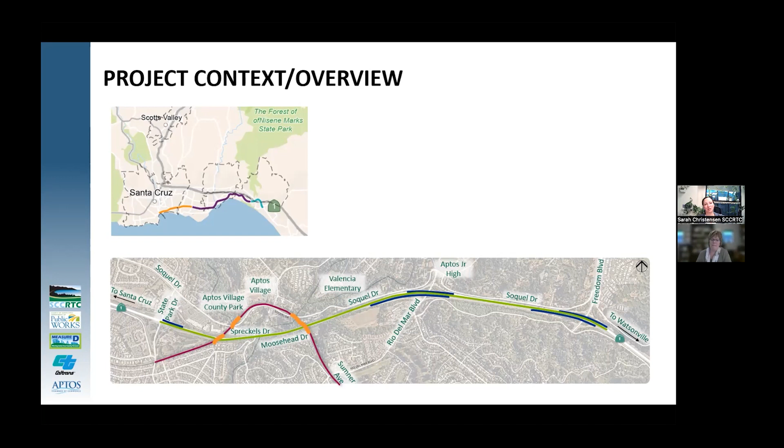Currently, the project is expected to complete the final design phase in late 2024, with construction activities beginning in 2026. The project team needs to hear your input on some of the key design elements to make sure the project fits within the context of our community.

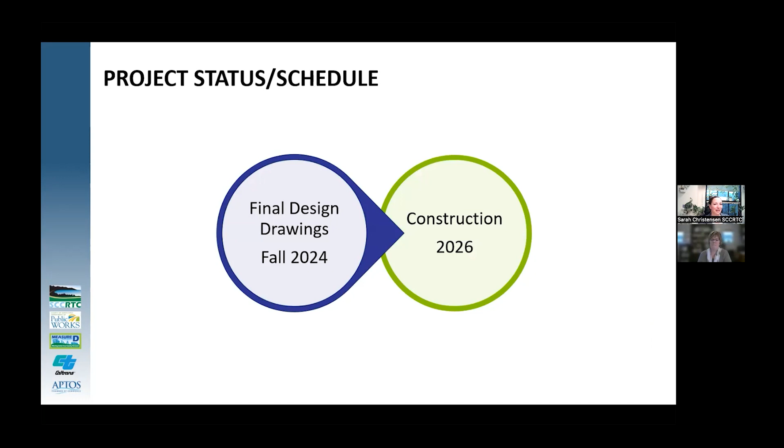Before we ask for your feedback, let's begin by showing some of the inspiration and corridor-wide design elements that have already been selected.

As Sarah mentioned, previous segments have set a tone for many of the design elements. As part of the previous highway design from the Bay Avenue to State Park Drive project, a gateway into Aptos was identified at the Mar Vista pedestrian overcrossing.

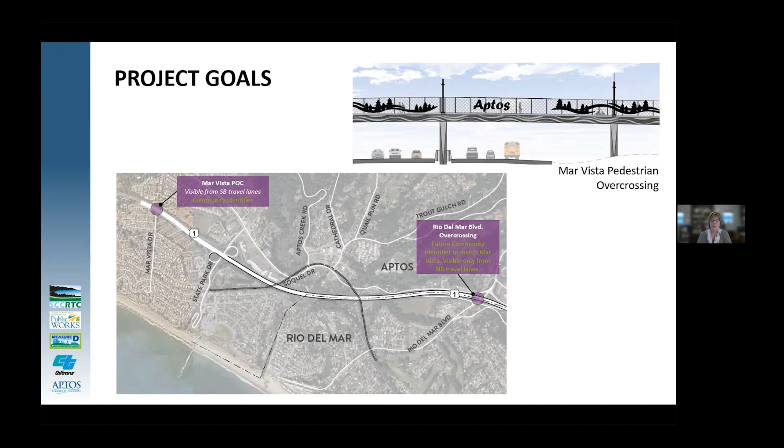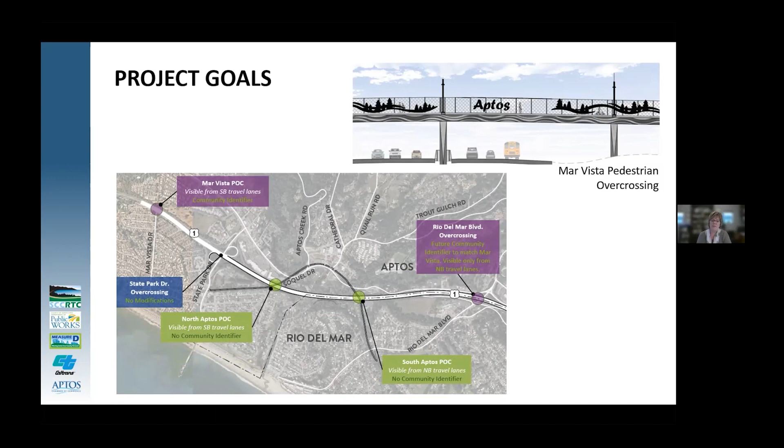And for this segment, we've added the possibility of placing a similar future community identifier at the Rio Del Mar Boulevard overcrossing as a gateway from the south. This allows for the 2 rail trail bicycle pedestrian overcrossings between them to have their own unique character that blends with the architectural theme of the town of Aptos.

All of the elements shown here are consistent with previous highway segments and intended to be easily constructed and maintained within the highway corridor. The proposed plant palette consists of native drought-tolerant trees, vines, and shrubs.

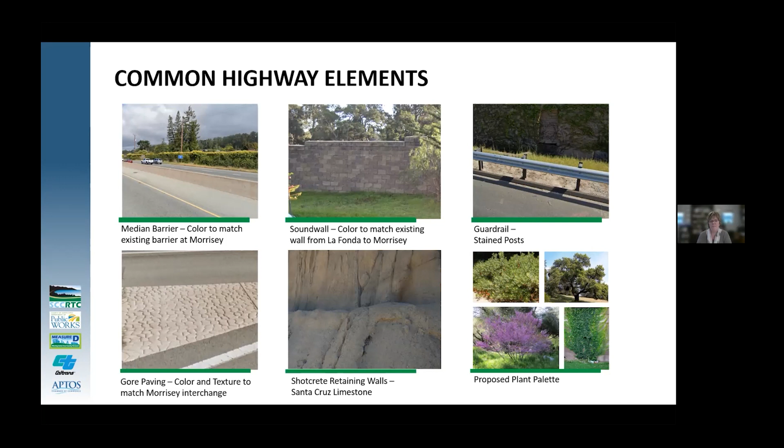The aesthetics for the rail trail were inspired by design elements within Aptos and adapted to a theme we're calling Bridging the Kelp Forest to the Terrestrial Forest. This takes inspiration from the existing rail bridges, historic character of Aptos, and the surrounding landscapes of the ocean, and blends it, bridging it, with ocean influences of waves and kelp, so prevalent in the seascape and Rio Del Mar communities, and previous highway segments and the forest of Nisene Marks State Park.

These renderings show the designs of the South Aptos Bridge bicycle pedestrian overcrossing and rail underpass, which will be duplicated for the North Aptos rail and trail bridges. A new overcrossing will be constructed next to the rail bridges to make a continuous rail trail through Aptos.

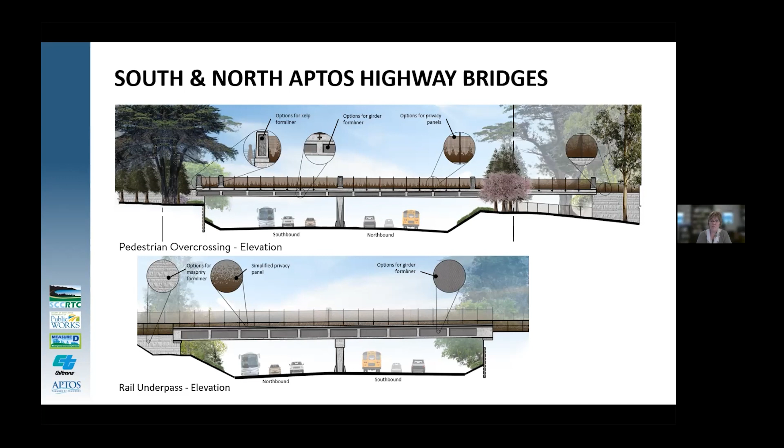The design combines the rustic industrial look of the rail line through the metal fence posts and brackets with nature-inspired formliner and misty redwoods-inspired privacy panels. The privacy panel, masonry formliner, kelp formliner, and girder formliner are all options for consideration in the survey.

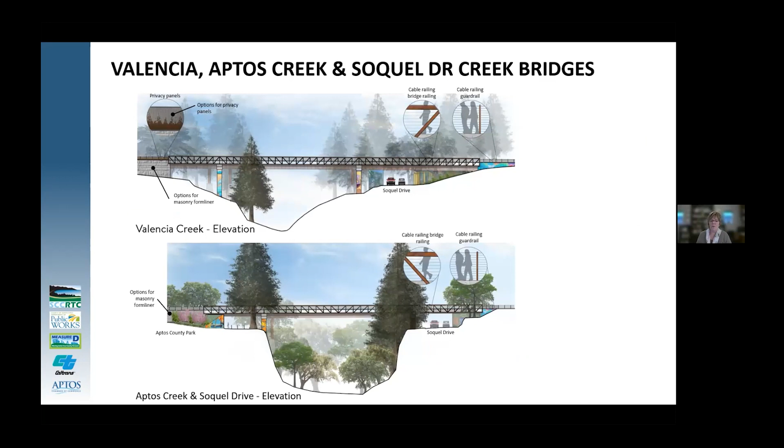These renderings show the aesthetics for the two bridges crossing Valencia Creek and Aptos Creek and Soquel Drive within the rail trail corridor. The aesthetic treatment blends existing trail bridge work with the rustic elements of the rail corridor and will be constructed with a prefab metal truss with cable railing. The privacy panel and potential mural locations will be options for your consideration.

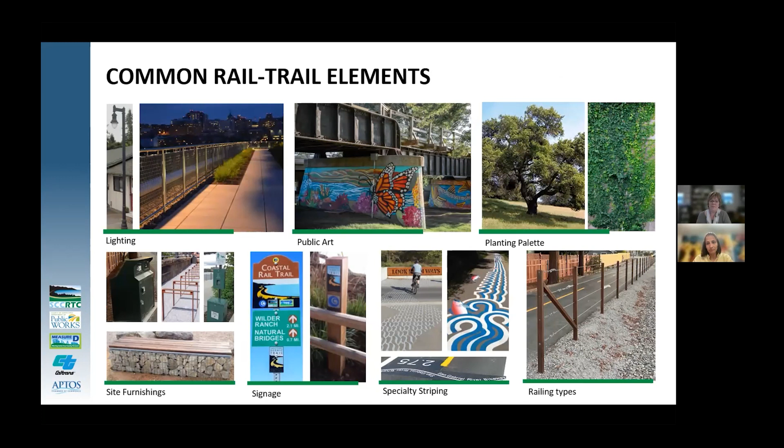As with the highway corridor, the trail corridor uses many elements consistent with the previous rail trail segments. Where space and opportunity exist, these elements will be incorporated within the rail trail. Thanks, Christine. All right, this is where we need your help.

Now that we have reviewed the highway and trail inspiration and the corridor-wide design elements, we will review the concepts that we're looking for feedback on today.

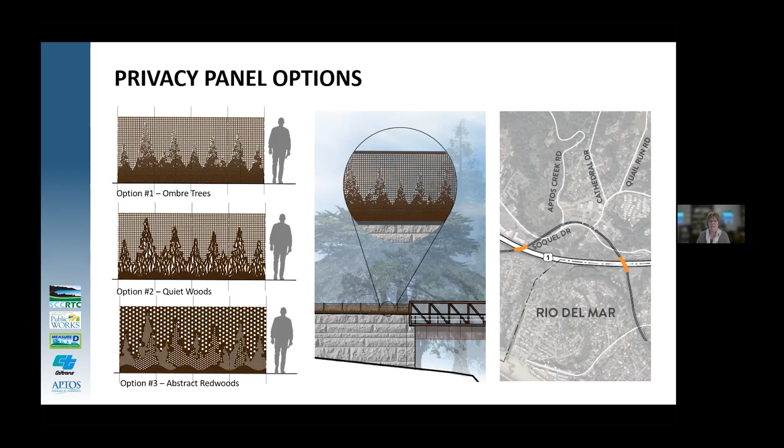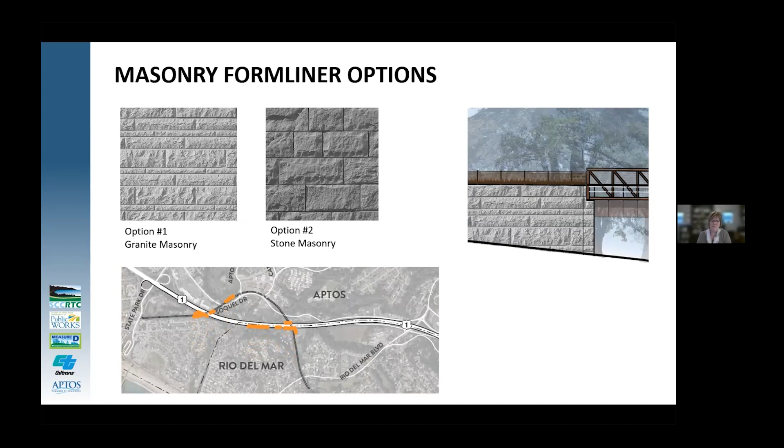The second feature is the masonry formliner. This formliner will be used at retaining and abutment walls near the 4 pedestrian bridges of the rail trail and 2 rail underpasses. The 2 options are granite masonry and stone masonry. Both would be constructed out of natural concrete.

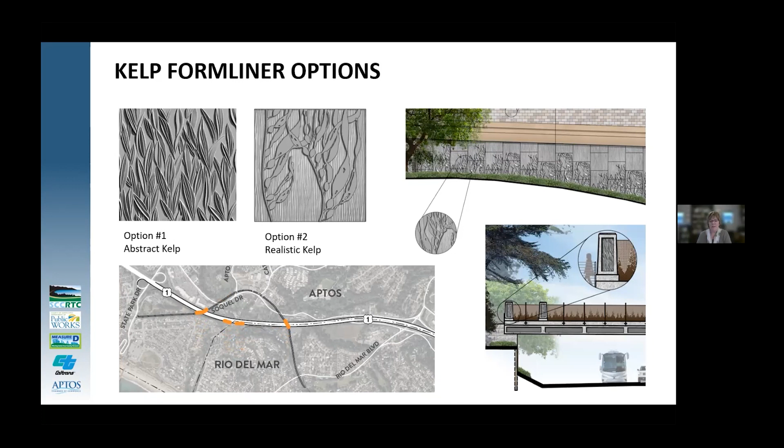The next element is the kelp formliner. This formliner will be used at retaining walls facing Spreckels Drive, Moosehead Drive, and as an inset within select bridge pilasters. The 2 formliner texture options are abstract kelp and realistic kelp. Both would be constructed out of natural concrete.

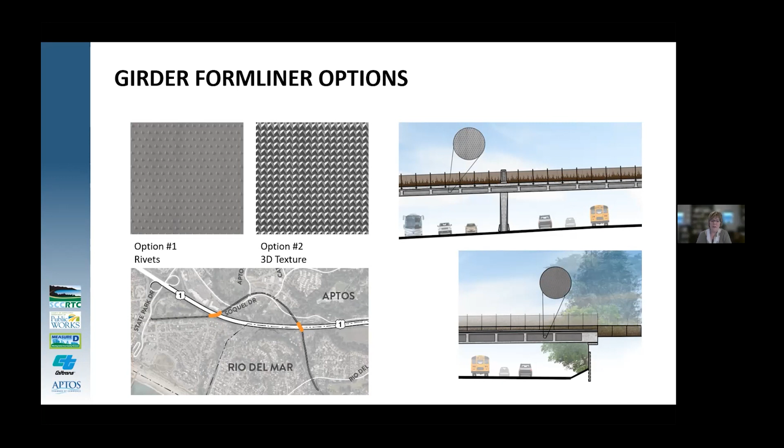The next item is the girder formliner. This formliner will be used to break up the widened girder faces of the highway overpasses and rail underpasses. These 2 formliner texture options include rivets and 3D texture. Both would be constructed of a darker, warm gray stained concrete.

The sound wall block color and texture will be consistent with the previous segments, but the possibility of adding metal cutouts to the walls is up for a vote. The sound wall is in 2 locations along the highway. The 2 sound wall options are no additional treatment, or misty redwood metal cutouts facing the highway and at key locations where the sound wall is visible from the local roads. Metal cutouts would be constructed out of laser cut metal and treated to match other metal elements.

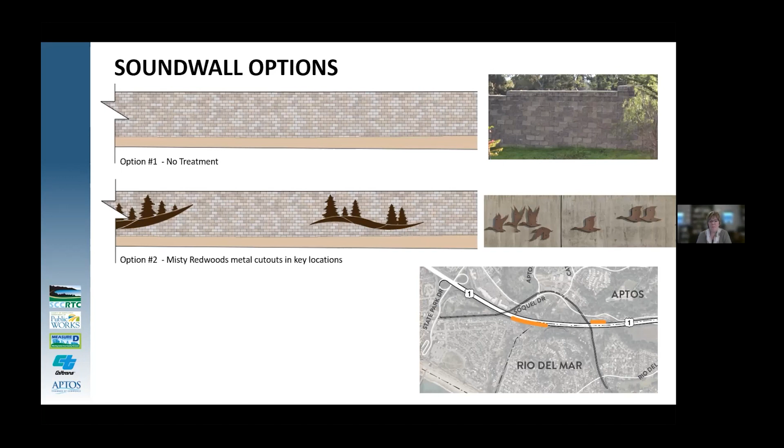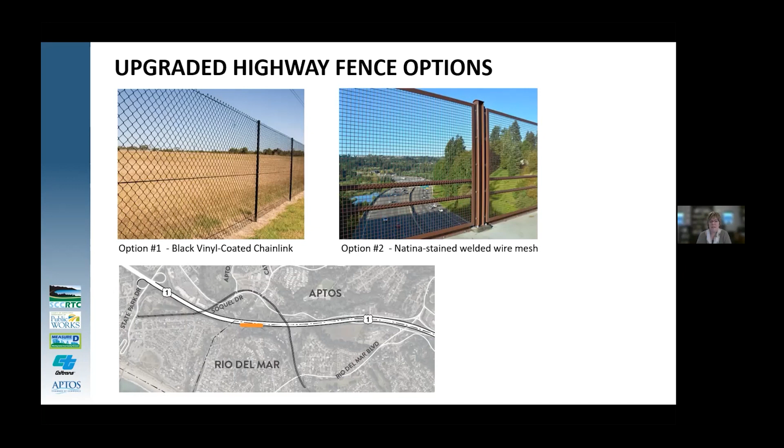There will be 1 significant location for an upgraded highway access control fence. This location occurs along Moosehead Drive at the top of an aesthetically treated retaining wall and will prevent access onto the highway. The 2 fence options are black vinyl coated chain link, or Natina stained welded wire mesh.

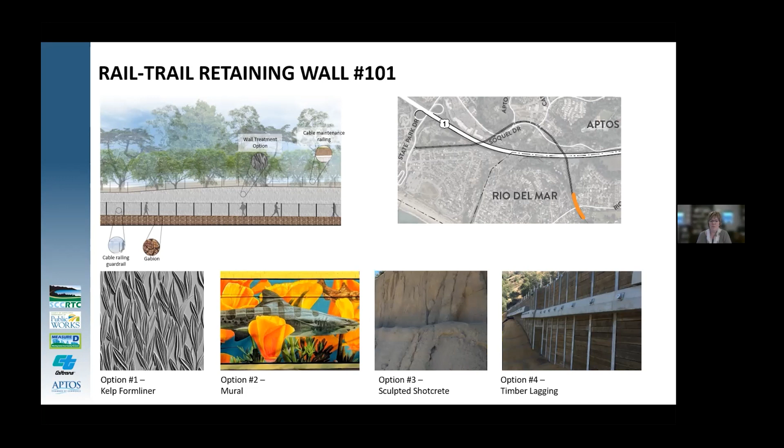This retaining wall faces the rail trail near Sumner Avenue. It is necessary to preserve trees at the top of the slope and create a terraced trail under the Rio Del Mar Boulevard Bridge. It extends approximately 700 feet in length and has a maximum height of approximately 19 feet. There are several options for this wall: kelp formliner, as previously voted on, a public art mural, sculpted shotcrete to match the highway corridor, or timber lagging. Regardless of the aesthetic option selected, this wall will require safety railing at the top.

The aesthetic focus team and community stakeholders recommended using public art where there were reasonable opportunities. Due to the significant number of retaining walls and abutments facing local roads and within the rail trail corridor, the team elected to focus this effort on mural placement. Now we need your help in prioritizing murals within the corridor.

We have 5 key locations listed in the survey. Place those locations in priority order, with 1 being your first priority and 5 being the last priority for where you want to see murals. These locations are: murals visible from local roads, for instance, new bridge abutments visible from Soquel and Spreckels Drive; murals visible from the rail trail, like Retaining Wall 101 on the last slide; murals visible from private properties toward the rail trail, for example near 9000 Aptos Street; and murals on existing and new creek/bridge columns.

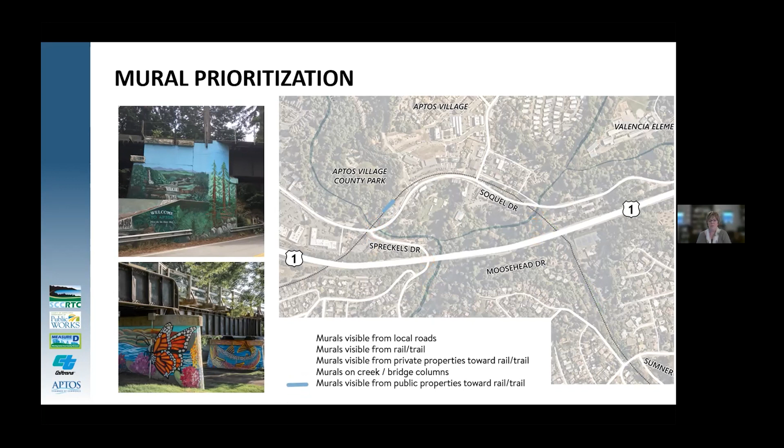Or murals visible from public properties toward the rail trail, for example at the retaining wall facing Aptos County Park.